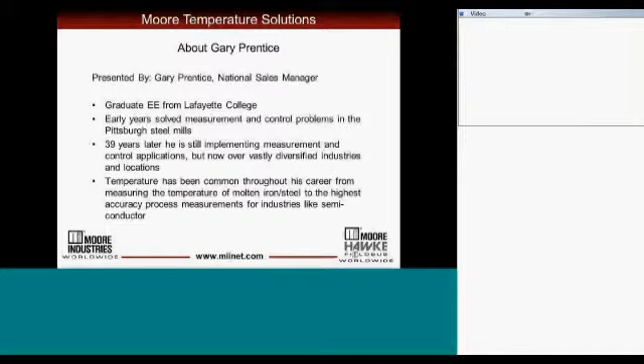Thank you, Richard. When I'm involved in a seminar on temperature, I'll often start by asking if anybody needs to measure temperature accurately. As you might imagine, the responses are all over the map, but there's one common answer I hear repeatedly: no, plus or minus 1 degree is fine.

That's actually a helpful response to me because it gives me direction on where I have to go with the seminar. It tells me this particular group really doesn't appreciate how hard it is to measure temperature to that degree of accuracy. Plus or minus 1 degree in the process environment is, in fact, a high accuracy measurement, and you really have to do everything right to achieve that degree of accuracy.

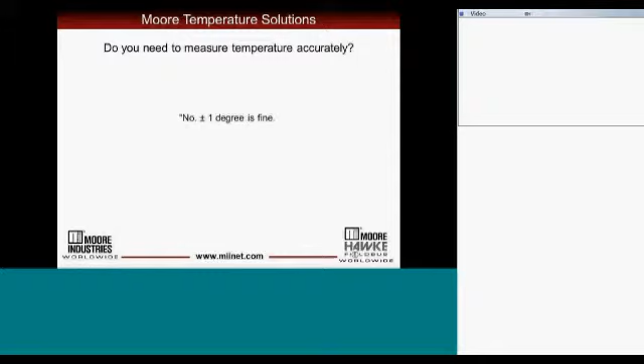If you look at your own processes, there are certain temperature loops where you know for sure you need to work on accuracy. Then there's a whole bunch of temperature measurements where you're really only looking for trends, so accuracy is not so important. And there's some number of loops in between, where you're on the fence, not knowing if you need to implement accuracy techniques or not.

For those measurements with uncertainty, what I'd recommend is asking yourself: do I need to calibrate these loops? Do I need to verify these loops? Are they part of a PM schedule? Because if the answer is yes, it means you have some amount of drift in those loops.

What happens is many of the techniques we employ to achieve accuracy also prevent drift. By selecting the right sensor, it reduces drift. By selecting the right measuring device, we reduce drift. By using 4-wire RTDs, we reduce drift. So if we can reduce drift for you, we're pushing out the frequency of your calibrations, and that's going to help with operating expenses. So accuracy, drift reduction, and operating expenses can all be interrelated.

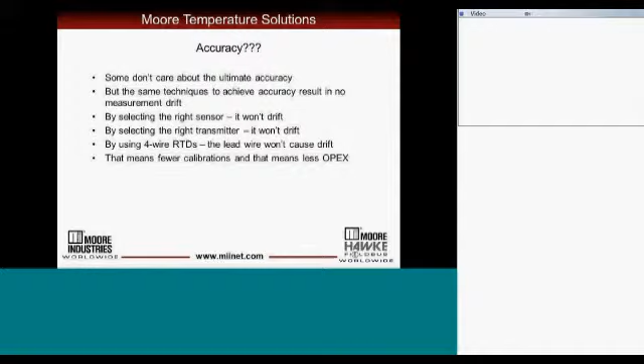So what I want to cover today in this session is several areas: one, take a look at selecting the right sensor for the application to achieve better accuracy; to look at ways we can eliminate error caused by the external environment; how do we reduce error contributed by lead wire; and then, is there anything we can do at the measurement level to reduce error?

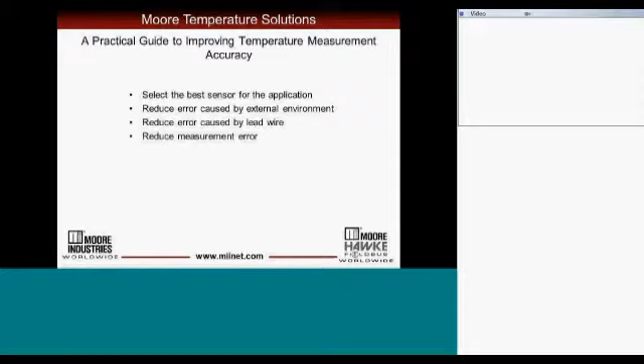Let's start with a simple application where we're trying to measure the uniformity of the product in this vessel, the temperature uniformity of this product. The operations folks have said we need plus or minus 4 degrees of temperature uniformity at an operating temperature of 250 Fahrenheit. We're going to use 2 sensors to help us measure whether or not we're getting that uniformity.

If we choose type J thermocouples, because that happens to be one of our plant standards, we may not be able to achieve our goal. We're going to see in a minute, one of the temperature standards we use in the U.S. tells us that a type J thermocouple is only accurate to plus or minus 4 degrees at 250 Fahrenheit.

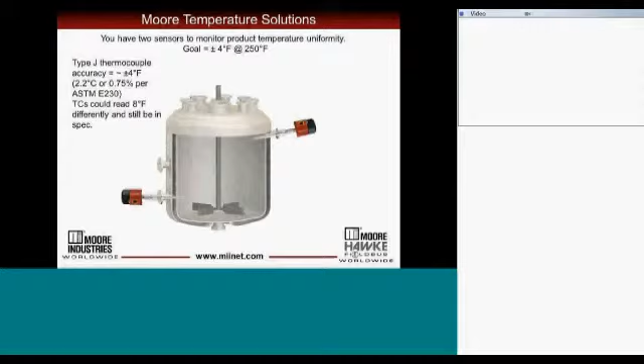So with two type J thermocouples and a product that is perfectly uniform in temperature, the two sensors could be disagreeing by as much as 8 degrees. At that point, you've got choices: you can calibrate out this error, you can begin a PM program so the two sensors stay in sync, or perhaps you want to consider changing the sensor. An option for a sensor to change to would be a Class A 100 ohm platinum RTD.

At 250 Fahrenheit, that sensor is accurate to 0.7 Fahrenheit. So with two sensors and perfectly uniform product, those two sensors could possibly disagree by less than 1.5 degrees, which is certainly way better than the 8 degrees of difference we could have seen with the two type J's.

So you're going to see as we go through this session, I'm very prejudiced in favor of RTDs for a lot of reasons, all of which are accuracy and drift related. By selecting the best sensor, you're going to make huge gains in measurement accuracy. And as far as I'm concerned, if the process temperature allows, I'll always reach for an RTD.

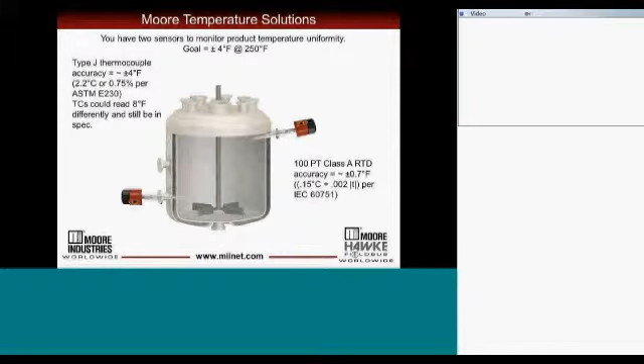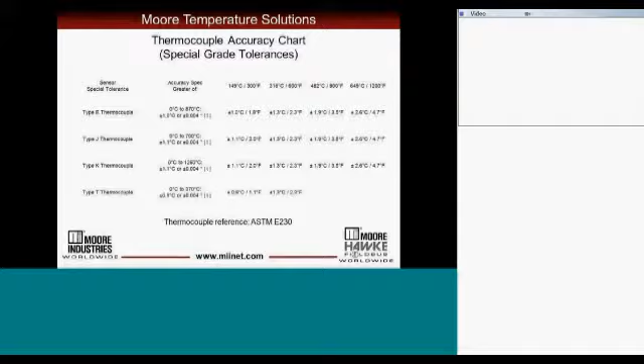If that's not sufficient for your application, then there's an option. We can use premium grade thermocouples, or what may otherwise be called special tolerance thermocouples. Basically, these thermocouples are made up from wire that has a higher level of alloy purity. And if you look at that same column for 300 degrees Fahrenheit, you'll see a premium grade J or K is accurate to plus or minus 2 degrees F. So we've cut our error in half.

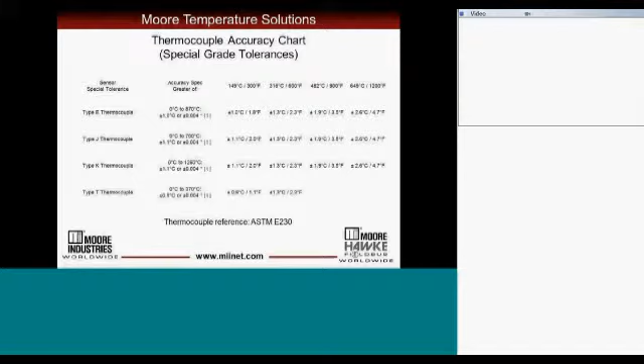If we moved on to considering an RTD, a Class A RTD, I've done the calculations for you at 300 Fahrenheit to keep everything on par. The Class A RTD is accurate to 0.8 Fahrenheit. So these three slides, if you look at the progression, we could loosely say that if you transition from standard grade thermocouples to premium grade thermocouples, you cut your error in half. If you transition from premium grade thermocouples to Class A 100 ohm platinum RTDs, you cut your error in half again. So sensor selection is, again, very important in your overall measurement accuracy strategy.

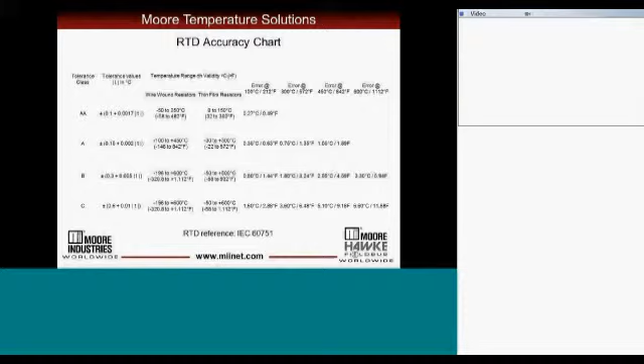Now let's look at extension wire, lead wire. We all have thermocouples that get direct wired back to PLCs and DCSs. And for those applications, we need to use thermocouple extension wire. Unfortunately, thermocouple extension wire is yet another source of measurement error.

Look at the column marked standard error. If you're using a standard extension wire for J or K thermocouple, that extension wire is adding another plus or minus 4 degrees Fahrenheit of error. That's on top of the thermocouple error.

If that's unsatisfactory, just like with the thermocouples, we do have a choice. The column off to the far right says special error. There is a special tolerance extension wire we could use that cuts the extension wire error in half. So that's an improvement. But keep in mind that the error shown assumes that this extension wire is, call it like new condition. It has not been contaminated by typical industrial atmospheric contaminants. As the wire purity, the alloy purity gets contaminated, this error just grows larger.

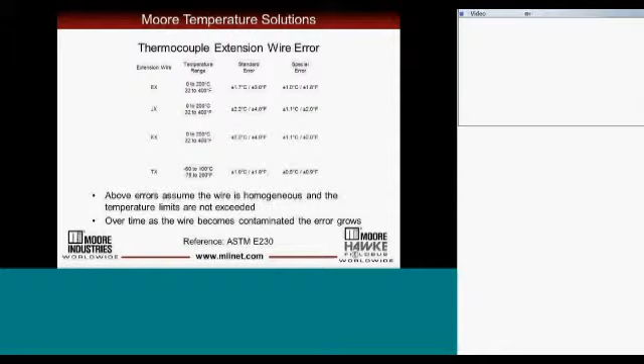How many of you even try to measure how much error is being caused by your extension wire? I don't know anybody that does that. Typically, they ignore the whole subject until operations says, I don't believe this temperature anymore, or there's catastrophic failure.

We all know thermocouples fail, but thermocouple extension wire also fails. And when it fails, it has to be replaced. If you replace it in kind, you're just reintroducing the errors that extension wire contributes to the measurement. So replacing failed extension wire with more extension wire just perpetuates the problems.

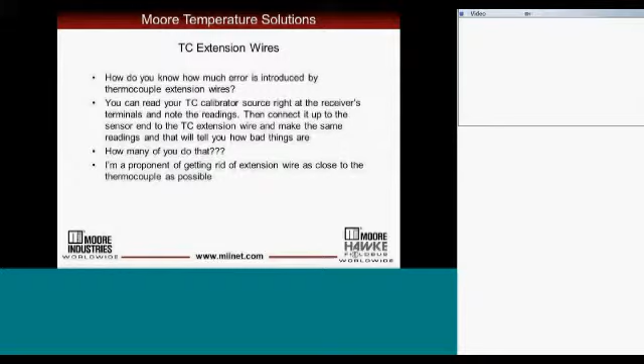So I'm a big proponent of getting rid of extension wire. And so what are the choices? What other technology is available to us to avoid or minimize the use of extension wire? It's temperature transmitters, it's remote I/O. Both of these types of solutions send their signals back to the DCSs and PLCs using copper wire.

Copper wire, you can expect, will last the length of the life of your plant, which is not true of the thermocouple extension wire. So at least there's benefit. Once you put the copper wire in place, you likely are never going to have to replace it.

Modern I/O products have the same performance characteristics of transmitters today. And with many of these direct wired sensors, their data acquisition points, you don't want to invest a transmitter on each and every one. Remote I/O is a very affordable alternative.

And again, it gets rid of that extension wire. You will have a short section of extension wire between your thermocouple and the transmitter or I/O. And because it's short, you're not going to break the bank if you use premium grade thermocouple wire and keep that error to a minimum.

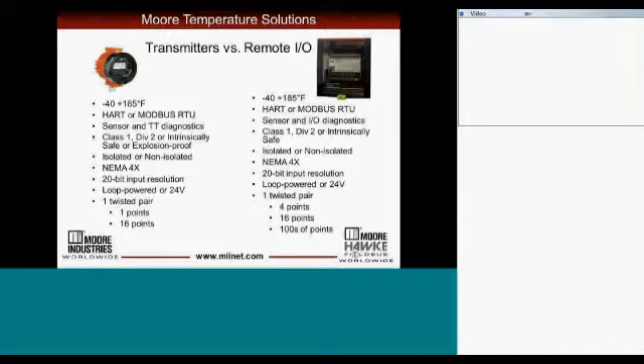If you have not studied the effect of extension wire on an RTD sensor, you may be lulled into thinking that there is no error because we use copper wire for bringing RTDs back to the receiving device. But that's not true at all.

The copper wire we use for RTDs is in fact resistance. RTD measurements are resistance. So if not handled properly, the lead wire we use for RTDs can contribute significant error to an RTD. The one way around it is to use 4-wire RTDs, and that eliminates all of the lead wire error. Let me build up to telling you the story about using 4-wire RTDs.

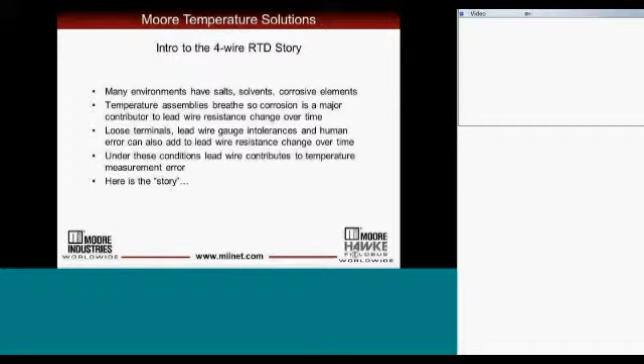In the microprocessor-based world, RTD measurements all start with constant current sources. The job of the constant current source is to generate the excitation current that's going to be fed through the RTD. Then we measure the voltage drop across the RTD. We use Ohm's law to calculate resistance. And then we apply the resistance to the RTD curve and read out the value in either degrees C or degrees Fahrenheit. So that's what everybody does today in making an RTD measurement.

When the industry first started using 2-wire RTDs, we realized immediately that this is not a very accurate measurement because, in fact, what we're measuring is the sum of the lead wire resistances, represented here by R1 and R4, plus the RTD. And if you have long lead wires and R1 and R4 are significant, the error can be significant. So very early on, then, we went to 3-wire RTDs.

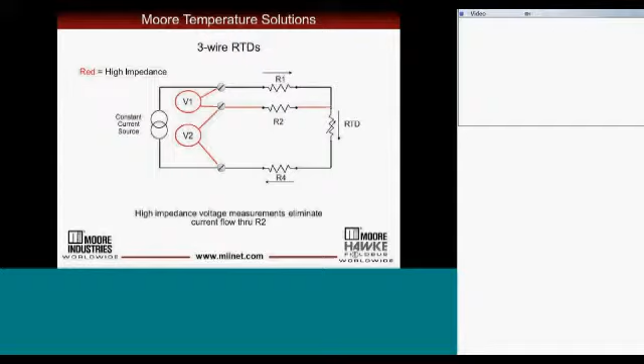And the trick to making sense of 3-wire RTDs, we've added the 3rd wire out to the RTD, but here I've colored that lead in red because I'm signifying that that lead is only internally tied to our high impedance voltmeter, if you will. And with it being high impedance, there is no current flow through the red lead. There's no current flow through R2. There is no voltage drop across R2. So anything that goes on with that 3rd lead can be totally ignored.

And then Murphy's law gets involved, and Murphy guarantees that R1 and R4 are never going to be equal. It's things we can't control, things like wire intolerances, gauge intolerances, work hardening of the wire as we pulled it. Assuming there's no installation errors, perhaps the biggest contributor to R1 and R4 never being equal is corrosion. Corrosion that changes the diameter of the wire and therefore the resistance.

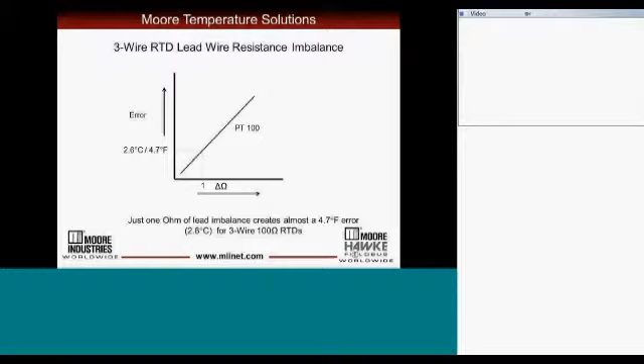So you can spend your life calibrating this out, or move on to a 4-wire RTD, which of course is my recommendation. And with the 4-wire RTD measurement, note that we have 2 leads that are colored in red. Those are tied to the voltmeter inside the receiving device. And that voltmeter, if you will, is high impedance, which means there is no current flowing through those red leads. That means the lead wire resistance R2 and R3 don't enter into the equations at all because there's no current flow, no voltage drop.

So now our voltage is measuring exclusively the RTD. Unlike the 3-wire, we're not measuring R1, we're not measuring R4. We don't have to subtract the two, and therefore we can never ever get an imbalance. So all that error that we saw due to resistance imbalance no longer exists.

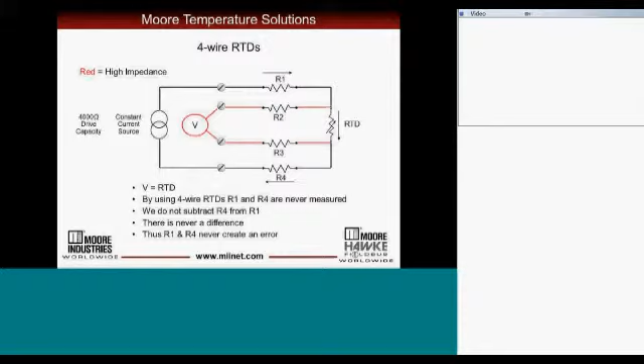So with a 4-wire RTD, you can have lead wire of any length. It can be varying in resistance constantly, and yet we have no error. The only thing you might have to consider is to make sure that the total resistance doesn't exceed the drive capacity of your constant current source. But with 4,000 ohms of drive capacity, it's virtually impossible to overburden that constant current source.

In my travels, about the only objection to using 4-wire RTDs that does make sense is if you have legacy input cards on perhaps a PLC that can't make 4-wire RTD measurements. They can only make 3-wire RTD measurements. So in those cases, perhaps it's time to retire that generation technology.

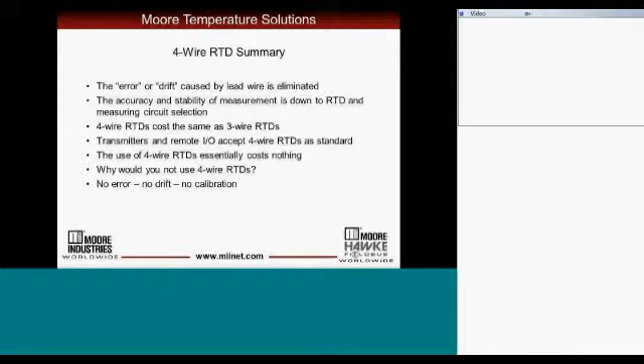Or, if for whatever reason 4-wire RTDs are not in your future, I want you to consider this trick. Upgrade your 100 ohm platinum RTDs with 1,000 ohm RTDs. We have the same error chart that we saw earlier, where for a 100 ohm platinum RTD, 1 ohm of imbalance causes a 4.7 degree error.

If we substitute a 1,000 ohm RTD for that same 100 ohm platinum RTD, and we still have 1 ohm of imbalance, the error is reduced by 1/10.

So expressed in terms of percent of span in that chart, if we were dealing with 0 to 300 and using 100 ohm platinum, that 1 ohm of imbalance would give us a 1.6% error, which is quite significant. Replace it with a 1,000 ohm RTD, and that 1 ohm of imbalance gives us an error of 0.16%, which is way more tolerable.

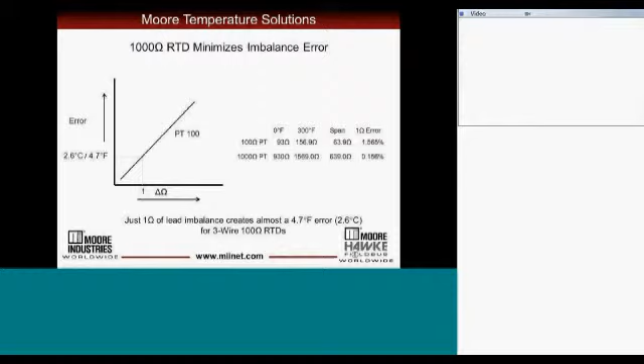We all have VFDs, motors, radios, noise sources of all types. If you're running thermocouples and RTDs direct wired back to the DCS or PLC, then you've got to remember you're transmitting long distances, very low millivolt level signals. Those low level millivolt signals are susceptible to distortion from this noise if you can't keep the noise off the lines.

This is a reminder, really, to use best practices to keep that noise off of your signals. For reasons I can't explain, we do a great job of protecting 4 to 20 milliamp signal wires, but sometimes we forget the temperature signal wires. So use drain wires, use proper grounding, use physical separation to keep noise off those low-level signals.

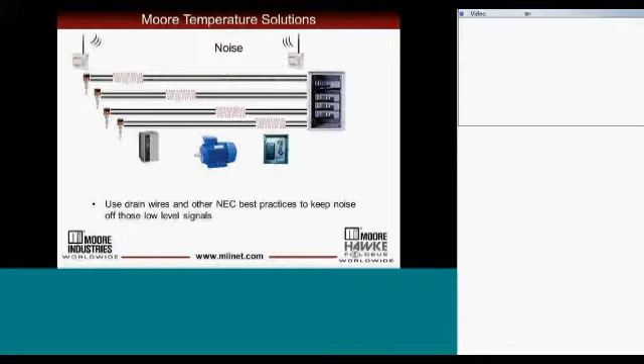Or another approach is to change those low-level signals to high-level signals as close to the sensor as you can, because a high-level signal is not affected as greatly as the low-level signals with the same amount of noise. So signals like 4 to 20 milliamps and HART protocol and RS-485 typically handle normal plant noise much more successfully than low-level millivolt signals.

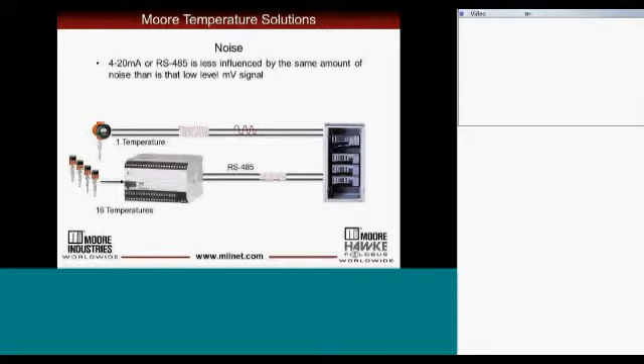Another form of external error sources is represented in these photographs. There are times when we head down a path of convenience and we end up creating temperature measurement errors. In both of these photos, we have solid sheath sensors that extend from the thermal well out into ambient conditions. And Murphy is pretty much going to guarantee that the ambient temperature is going to be way different than our process temperature.

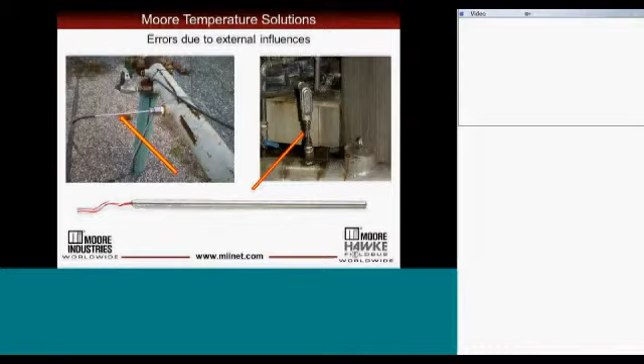So what happens? Well, there's a wicking effect. The solid sheath that's out in ambient is wicking temperature away from your process hot junction. Or as shown in this particular sketch, it's just the opposite: the ambient temperature is very hot, the process is very cold. So heat flows from ambient down the metal sheath into the process well, and it creates offset errors.

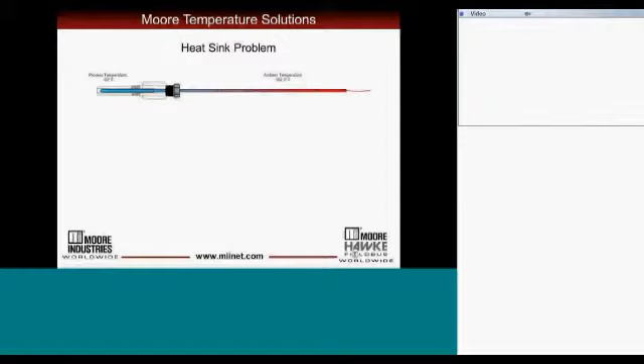If it doesn't create an offset error, at a very minimum it's going to produce an extensively long delay in your measurement response. The solution is simple: change the configuration of your sensor so the solid sheath is totally embedded in the thermowell, and does not extend past the well into ambient conditions. This is another example of eliminating errors caused by ambient conditions.

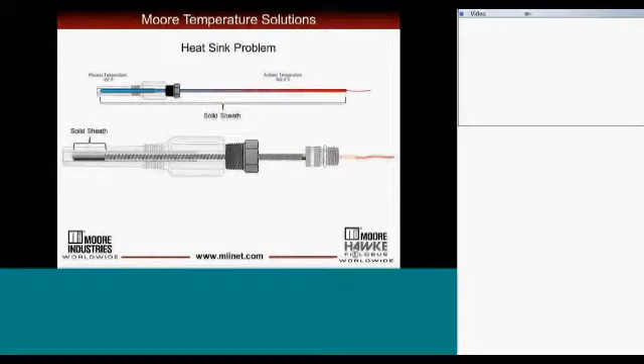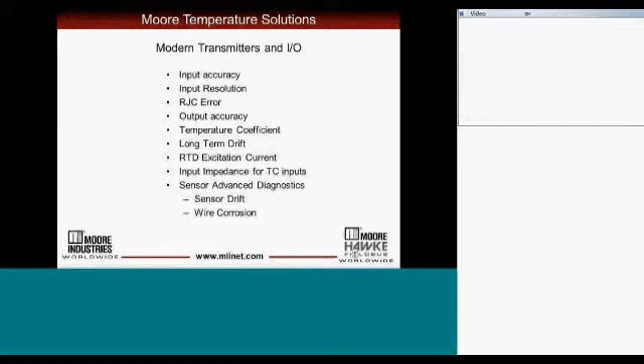If you're chasing absolute accuracy, then you've bought the very best sensor you can afford for the application. Even though it's the very best, there's still some minute error in that RTD. If you're looking for the very best in accuracy, you can't ignore that final bit of error in the RTD - you've got to get rid of it. There are a couple of techniques we use to get rid of that. Bath calibration or Callendar-Van Dusen both lend themselves to eliminating that final bit of error and giving you the ultimate in results.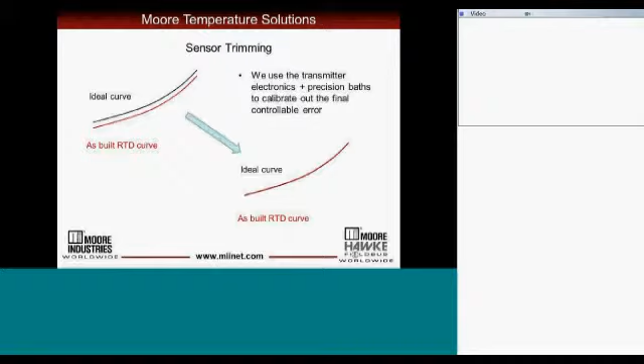If you're using remote I/O or transmitters, those devices make your temperature measurement and digitize the value. If you then choose to send that temperature signal back to the DCS or PLC via 4 to 20, that decision has just created two more errors in your measurement - it's already digital in the field at the transmitter or I/O.

To turn it into 4 to 20 milliamps, you have a D to A conversion error. Then back at the DCS, we have to convert the analog signal back to digital, which has an analog to digital conversion error. So I really recommend that once the temperature is digital, keep it digital all the way back to the control system and avoid those conversion errors.

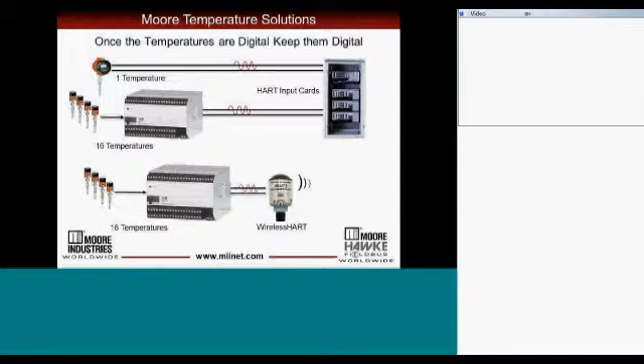Using HART protocol is one technology to allow you to keep it digital, or you can use Modbus serial or Modbus over Ethernet or other ways to keep it digital.

Earlier we saw that transmitters and I/O helped eliminate error by eliminating thermocouple extension wire, which is an error source. We saw that transmitters and remote I/O is a tool we could use to eliminate error caused by noise on our lines. And now we're using transmitters and I/O to eliminate analog conversion error. So we have a common theme.

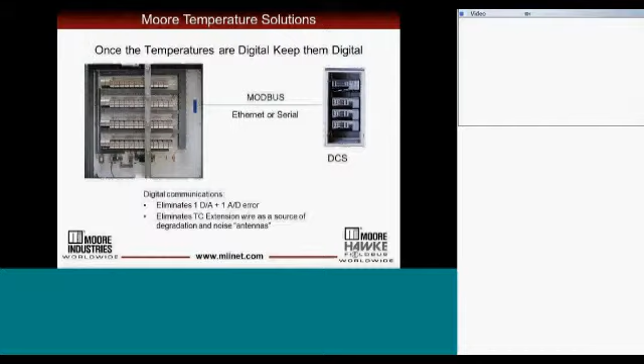Let me just summarize what I tried to communicate. These are what I believe to be practical steps that any of us can take to improve temperature measurement accuracy. These same steps also improve the stability of your measurement and minimize your calibration frequency and cost.

Use 4-wire RTDs whenever the process temperature permits you to do so - that eliminates all the error caused by lead wire. I also recommend that you use Class A RTDs whenever possible. The price differential is insignificant, and it's a marked improvement in accuracy.

If your process temperature requires the use of thermocouples, then use premium grade thermocouples and premium grade extension wire. Be sure when you're direct wiring sensors back long distances to implement noise protection strategies to keep EMI and RFI off those low-level signals. Better yet, get rid of thermocouple extension wire and use transmitters and remote I/O to digitize everything, transport it over copper wire via high-level signals, and avoid many of the issues we discussed.

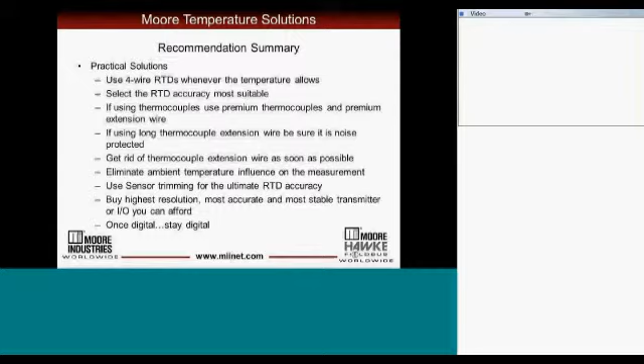Buy the highest accuracy, most stable measuring system you can afford, whether it be transmitters or I/O. And once you have this temperature signal digital, keep it digital back to the control system. With that, I say thank you for listening and open the floor to questions you may have.